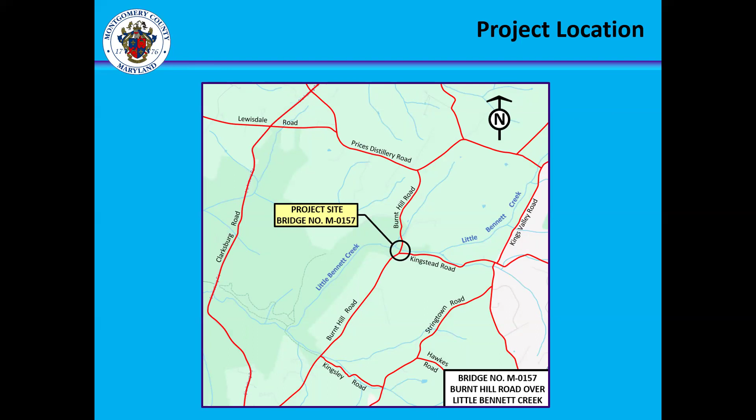Burnt Hill Road is listed as a rustic road in the 2023 Rustic Roads Functional Master Plan. This road has no existing or planned bike facilities. The speed limit is 40 miles per hour, with an advisory of 35 miles per hour. Back in fall 2022, we did a traffic count, and it seems about 825 vehicles per day travel this corridor.

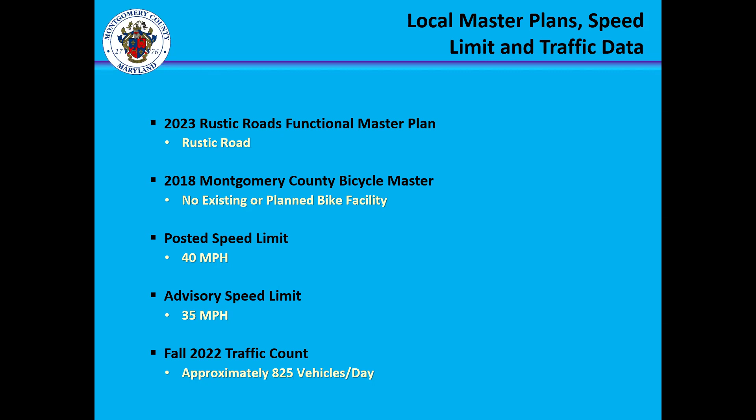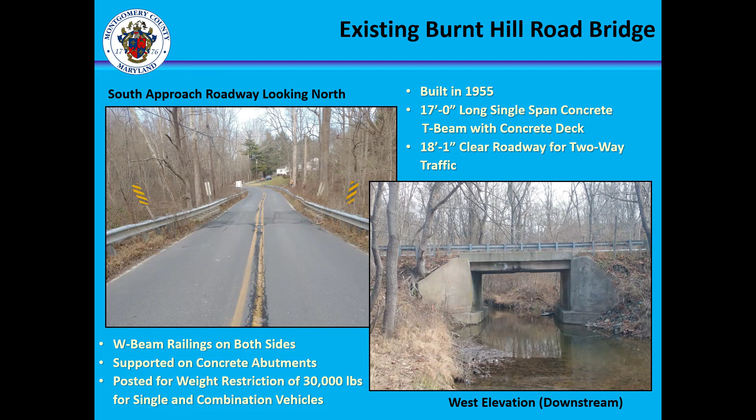The bridge was built in 1955, and it's a 17-foot long single-span concrete T-beam with a concrete deck. On the surface we have two lanes, and the width of the road is 18 foot 1 inch. We have W-beam railings on both sides, and the bridge is supported on concrete abutments. It's weight restricted to 30,000 pounds for single and combination vehicles.

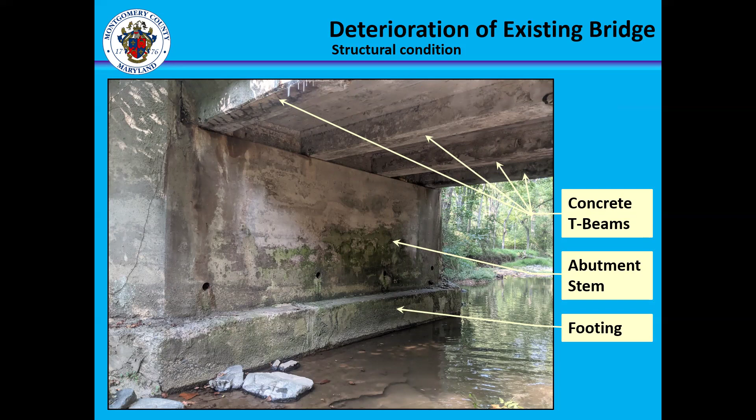I want to show some of the members of the existing bridge. If you're on top of the bridge sitting on the pavement, that's what we call our concrete slab. Right below the slab we have concrete T-beams. Those support the slab and rest on the abutment stem, and then the abutment stem rests on the footing. So all that's basically one component. I want to show this because I'm going to talk about some of these members later in the presentation.

The deterioration of the bridge involves 5 different components. The first is on the very top, the concrete deck. You can see the asphalt overlay and patching on the pavement itself. The W-beams have been hit by cars running by, and there's scrape marks along different parts of the railings.

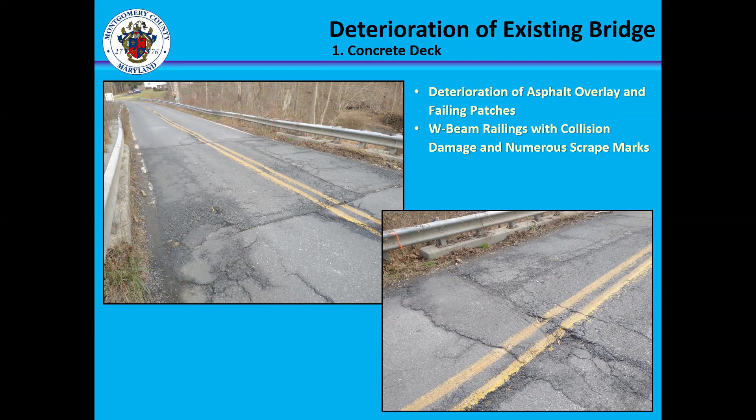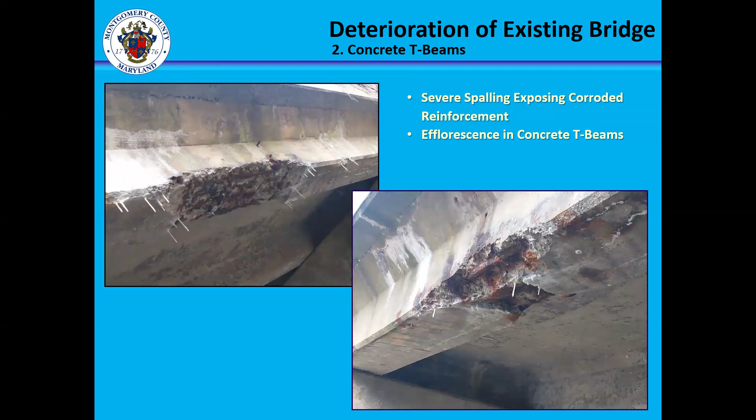The concrete beams underneath the deck have shown deterioration. Basically what we have is spalling, and you can see the existing reinforcing steel and efflorescence in the concrete beams. The more this occurs, the less capacity the bridge can take for carrying heavier weights. Next we have the concrete abutments.

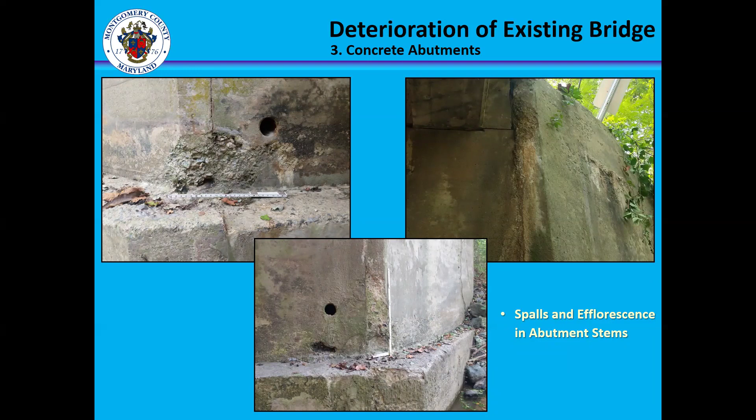In the concrete abutments, you can also see spalls and efflorescence all around the stems at different locations. Now we have what we call concrete footings. This bridge has water flowing underneath it, and some of these storms over the years have gotten bigger, causing scours, which is undermining of the footings. On the north footing, this is quite visible, that a scour has occurred. If this continues, the stability of the foundation becomes into play. Right now everything's fine, but down the road this could be an issue.

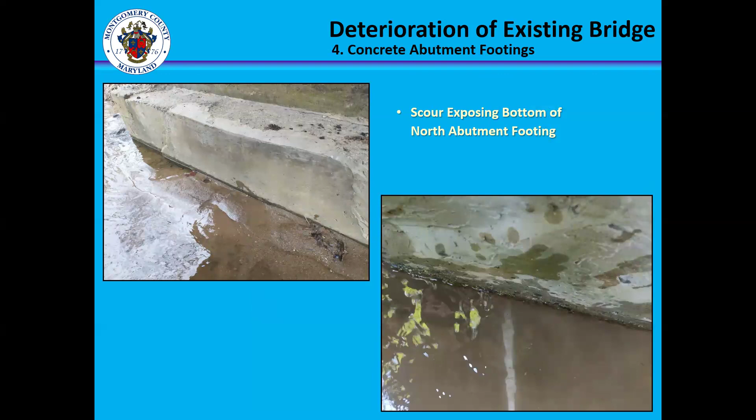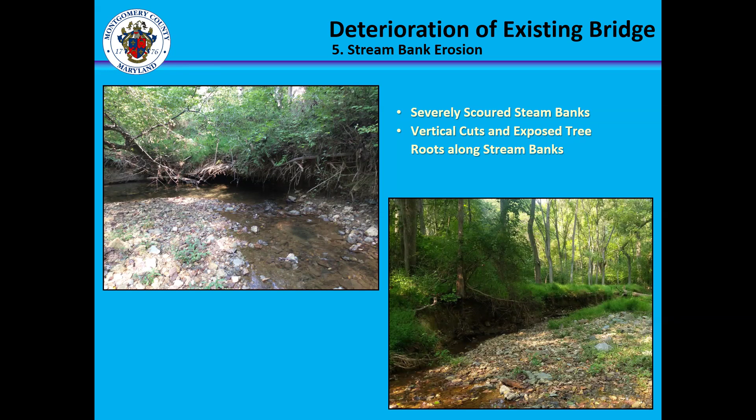So that covers the existing condition and some of the issues we see. The bridge is up there in age, close to 70 years old, so these things are expected. What we're proposing to do is replace the existing structure. We're looking at stabilizing the stream, providing scour protection, and repaving the existing approach roadway.

Now, on the part of stabilizing the stream, we are working closely with parks at this point. We're trying to balance the stabilization of the stream versus the cutting down of trees.

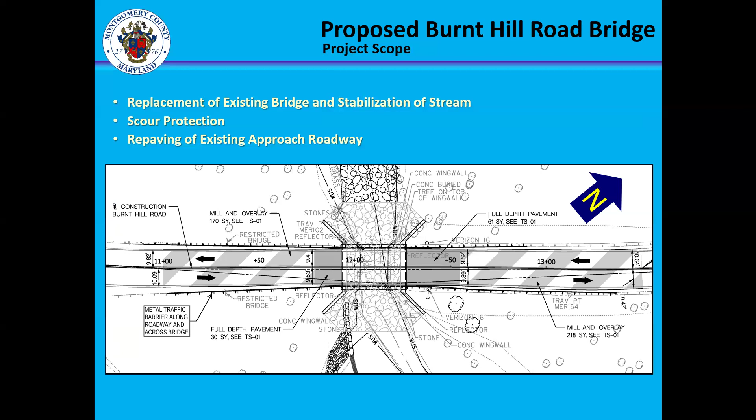There's kind of a fine art to this, and it's something the park is very good at, so we're working with them closely. We have a plan right now, but it's being refined, and that will occur over the next 3 to 6 weeks where we'll come back with a good plan of what we want to do. I just wanted to let you know that's what's happening on the stream.

This slide shows the actual structure in plan view, looking top down like from an airplane. You can see the bridge opening has increased in length, the bridge itself has increased from 17 feet to 34 feet, and the width has increased from 18 feet to 20 feet. Those little circles or ovals underneath the bridge are the riprap, which help with scour protection of the structure.

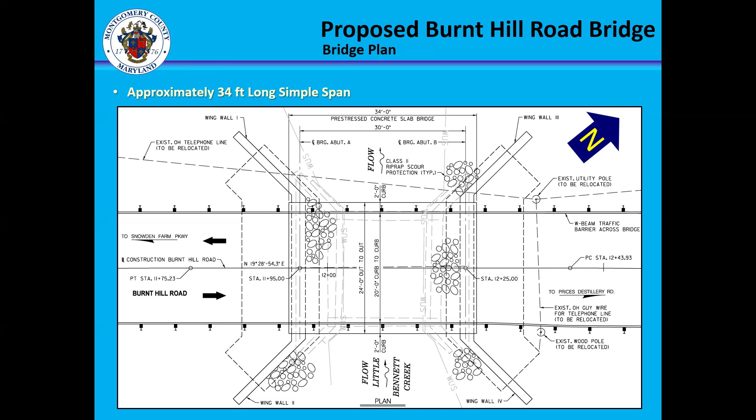Now, the bridge railings are currently galvanized, so we're thinking either galvanized or maybe brown - we're not sure yet exactly what we're going to do. That's something you may weigh in on, and something the rest of the committee will definitely weigh in on as far as the color of the rail. Next slide.

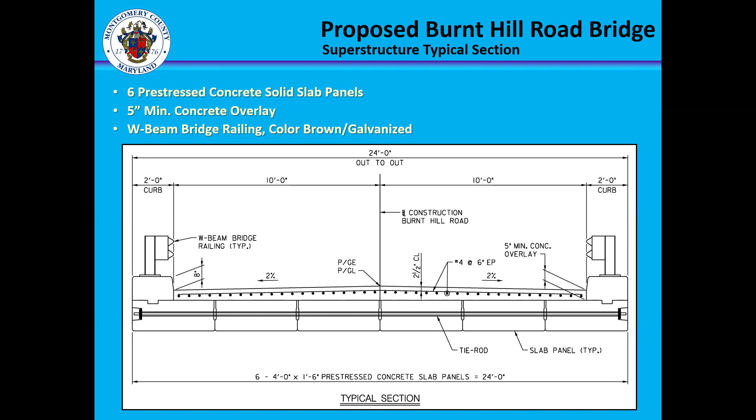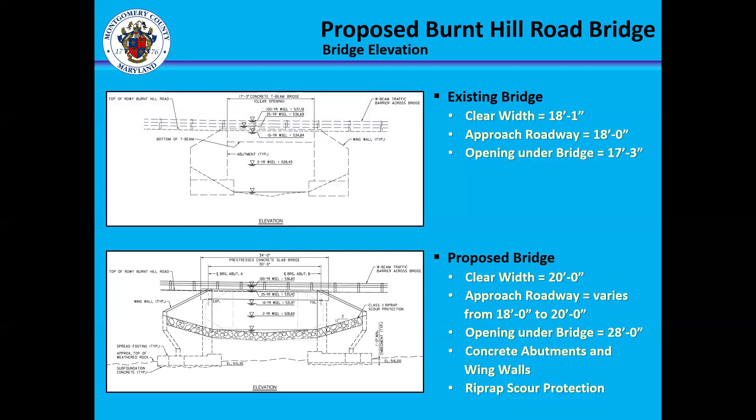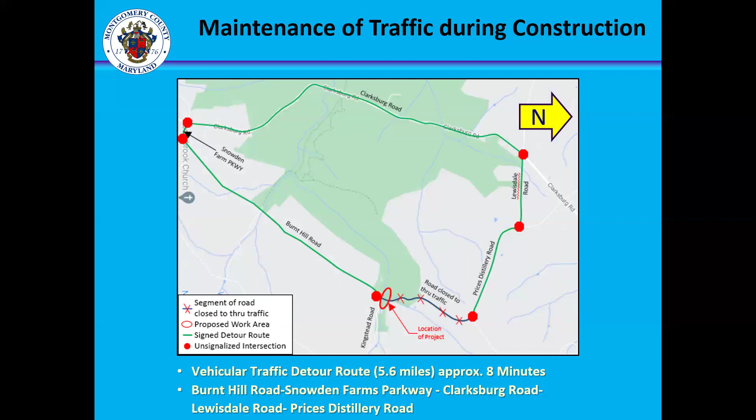The detour itself starts at the corner of Kingstead Road and Burnt Hill, going south to Snowden Farm Parkway, which is currently closed - that project is supposed to be completed in spring of 2024, well before we'd be using that part. Then we'd turn right to Clarksburg Road, towards Lewisdale Road and then Price's Distillery Road. The detour is about 5.6 miles and would take about 8 minutes. Next slide.

Now we're going to talk about the project cost estimate, the funding, and the schedule. Right now the project is at 30% design, and we have all the funding for the engineering. This is a Montgomery County funded project, with no state involvement. Engineering cost at this point is around $600,000, and the project construction and management is going to be in the neighborhood of $3 million.

We don't have that funded at this time. Our proposal is to go to the county executive this summer 2024 and request that money for construction and construction management. If it gets approved, then the following schedule will continue.

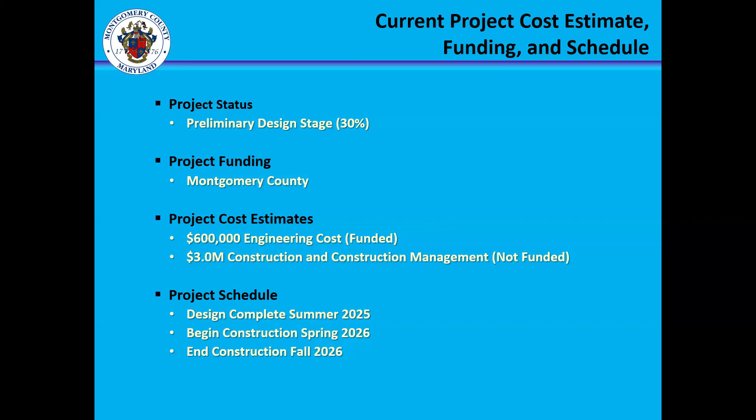We would have the design complete in the summer of 2025. Construction would begin in the spring of 2026 and end in the fall of 2026. However, the closure itself will be limited to June 18th to August 25th. Next slide.

So what are our next steps? One, we would proceed with the final design based on comments from the Maryland National Capital Park and Planning Commission, Montgomery County Department of Permitting Services, and Montgomery County Department of Transportation.

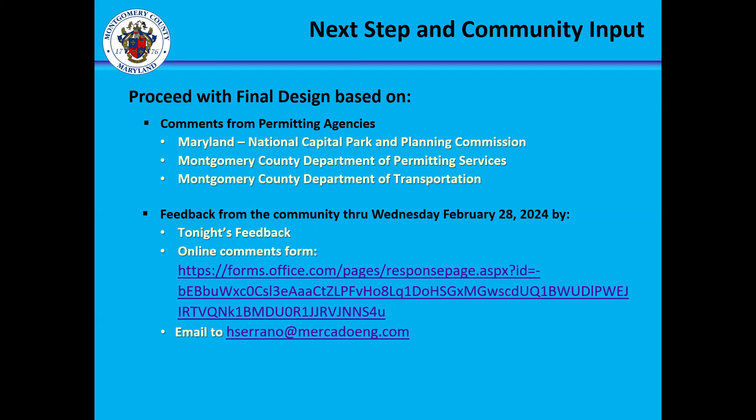Also important, we do want to hear back from you as to feedback that you have, and you can do that by asking questions tonight. If not, there's an online comment form you can fill out, or you can email me directly with any comments or questions that you may have. Next slide.

Right, Lori, see what we got. I do not have any hands raised, and I don't have any questions in the chat at this time. Okay.

There were some questions that were emailed or on the registration form, and I can try to get those answered. We do have a couple of comments. May McDermott said it was a fantastic presentation. Well, thank you. She said it's the best she's seen about a plan.